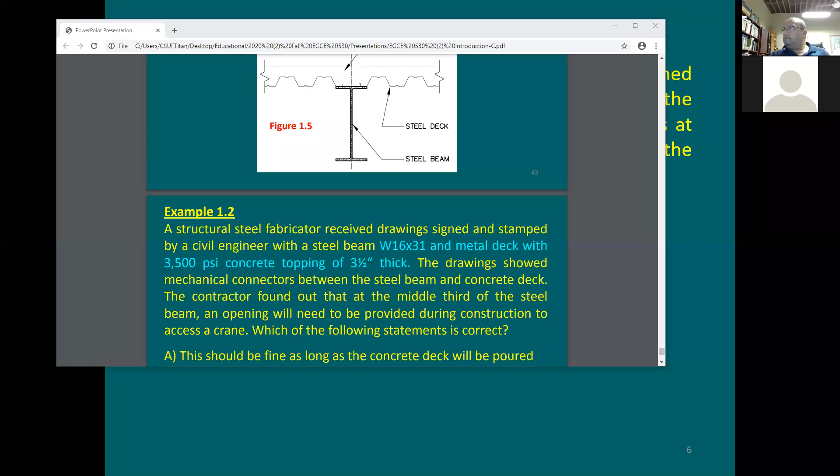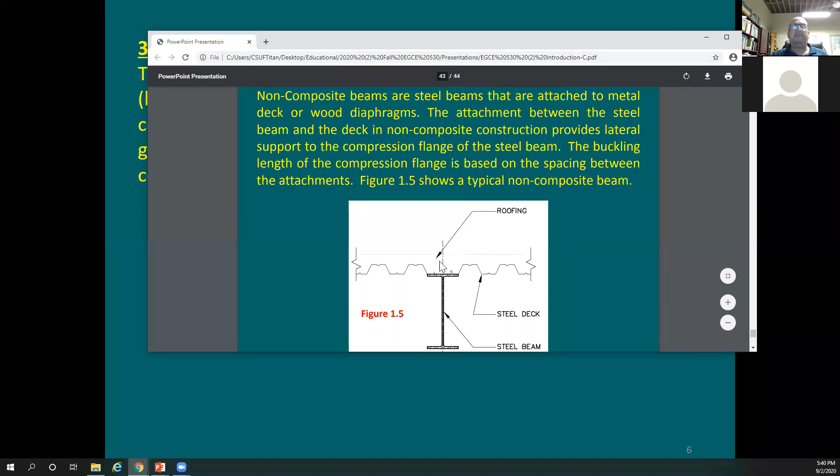So we have discussed what we have here in terms of composite and non-composite beams, a concept. Now, since we have this composite beam or non-composite beam, we're going to have a metal deck, and the metal deck is going to be attached to the steel beam.

In composite, the stud spacing - because this stud is not going to be just one stud, it's going to be many studs throughout the length of the beam. And the maximum spacing between two studs is going to be a foot, like 12 inches.

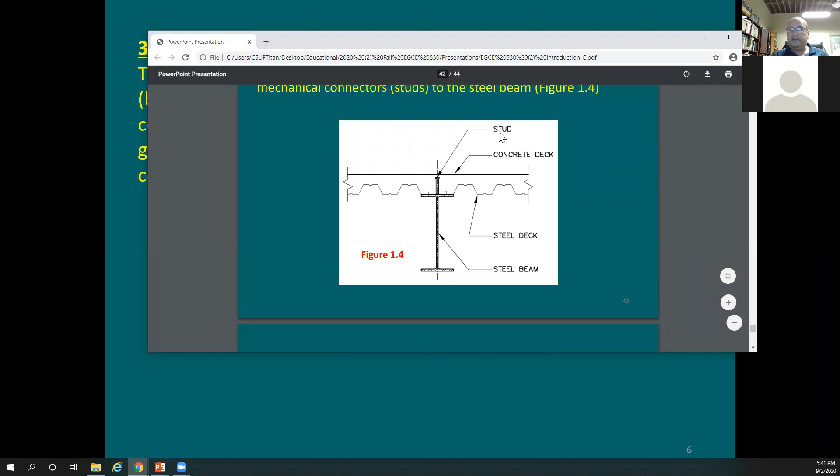In this case, the top flange is going to be completely braced from lateral movement, right and left. Once you put any loads, if there's no bracing to the top of the beam, this top flange now wants to go right or left. It depends on the loading.

Sir, what is the maximum spacing allowed between two studs? Maximum spacing 12 inches usually.

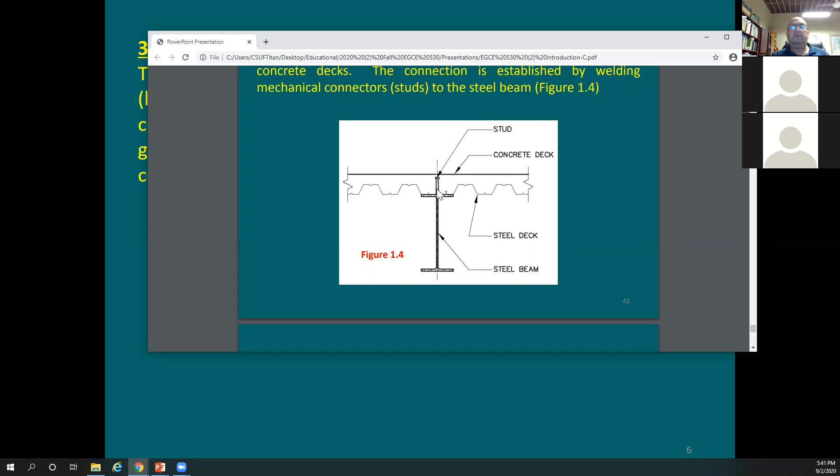In construction, we make it from a stud to a stud throughout the length of the beam, which means perpendicular to the screen here, is going to be a foot, like 12 inches, right? Okay, so with this spacing here, there is no chance for this top flange here to deflect right or left.

So in this case, the deck is going to be attached to the top of the beam. It's going to be bracing it. And this is going to be good because the buckling length of the beam here is going to be equal to, let's say, a foot. It's going to be very small.

Now, what happens if there is no good connection between the metal deck or concrete deck and the beam? It means here that the top of the beam is going to be rotating right and left, moving right or left. And the strength of the beam is going to get reduced.

It's not going to be as strong as when you have this connection between the metal deck and the steel beam, whether you have it as composite or non-composite. But just because of this, the top of the beam is going to start to buckle either right or left, it's going to be a loss in the strength.

And I'm sure that you guys studied this in steel one, and you have seen graphs that show with the buckling length of the beam, you're going to have some reduction in the flexure strength, not the shear strength. Okay.

Let's say that you have a beam here, and there's no metal deck on the top, nothing at all on the top, which means no bracing.

But you come here, you start to put some bracing points. How do you put these bracing points? By providing either a brace in the lateral direction, which means if I'm going to go back here, I'm talking about that you're going to see a beam going right and left.

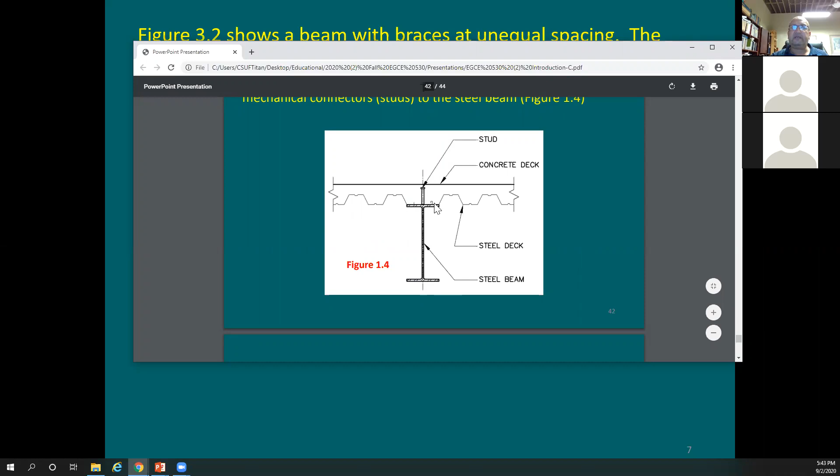Or a brace, like a steel brace that you're going to see there. This is what you call a bracing element, or this is going to be putting here a bracing point for the steel beam. Now let's look here at the maximum spacing between two brace points.

So instead of having the total buckling length of the beam be the span, we're able to reduce it to L3. So in many cases, you start to design an unbraced top flange beam, and all of a sudden the strength is not good enough.

So one of the options you can do is put here a bracing point, let's say at the mid span, and with that, you cut the buckling length into half. This is provided that I don't have a metal deck on the top, because the easy way, instead of adding a structural member for bracing, is to just attach the metal deck to the steel beam.

So now we have two options. Some beams have metal deck, and in this case, it's going to be bracing the top flange of the beam, and the buckling length is going to be almost equal to 0. If you have metal studs connected to the concrete, let's say it's going to be about 12 inches or a foot, which means design-wise, it's going to be equal to 0.

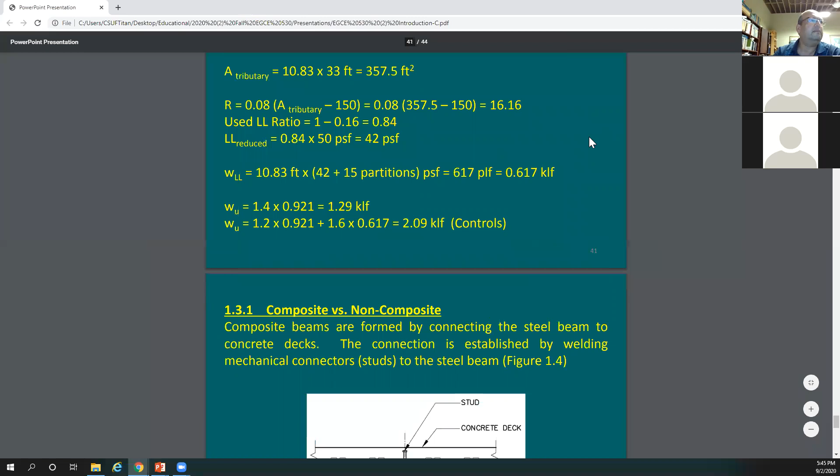What is the Z factor? Z factor is going to be the section modulus, and you can read it or look it up from the steel section tables.

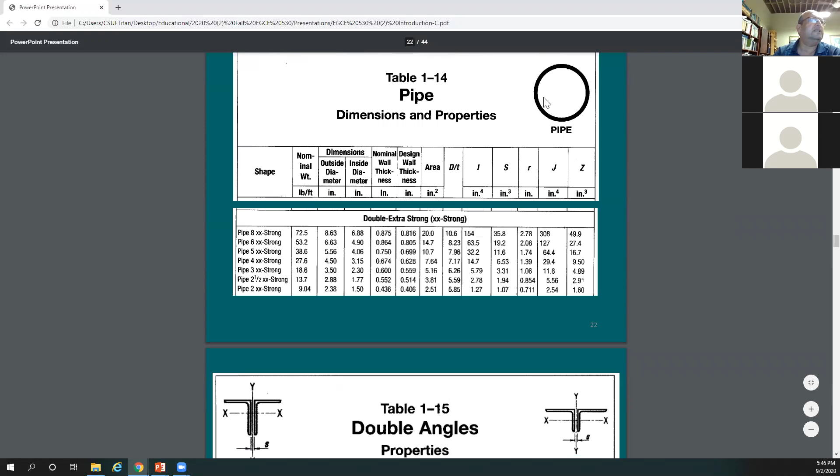Let me go up here, W sections, this is from the introduction slide set. Can be going here, let's hope it's gonna be there, it's gonna be on the other side of the page. Do you guys have the steel manual handy? Anyone has it handy?

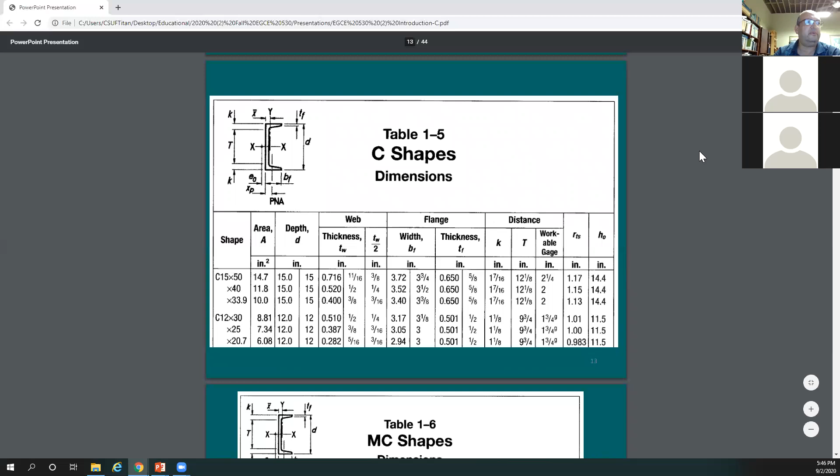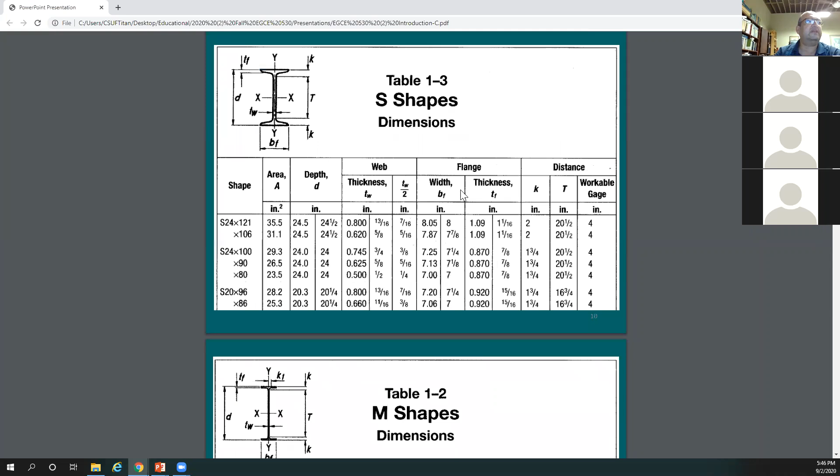Yes, professor. Okay, like in this value, for example, this Z, section modulus. Usually in the steel book, you're gonna see two pages against each other, next to each other. The left page includes this, like the W section, this is the section I have out of it. The right page shows lots of other information like moment of inertia, radius of gyration, and many other values, including also section modulus.

Section modulus, we have two of them: the elastic and the plastic one. The elastic is called, like in here, S - this is the elastic section modulus. The plastic section modulus is this Z, and usually this is more than the elastic value.

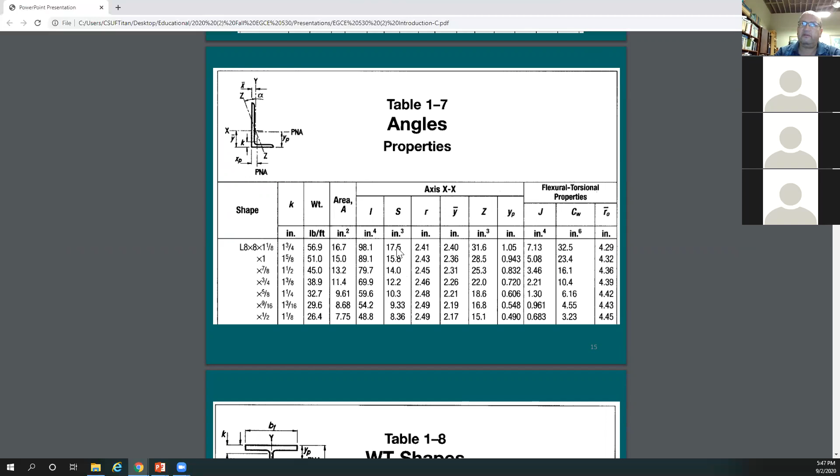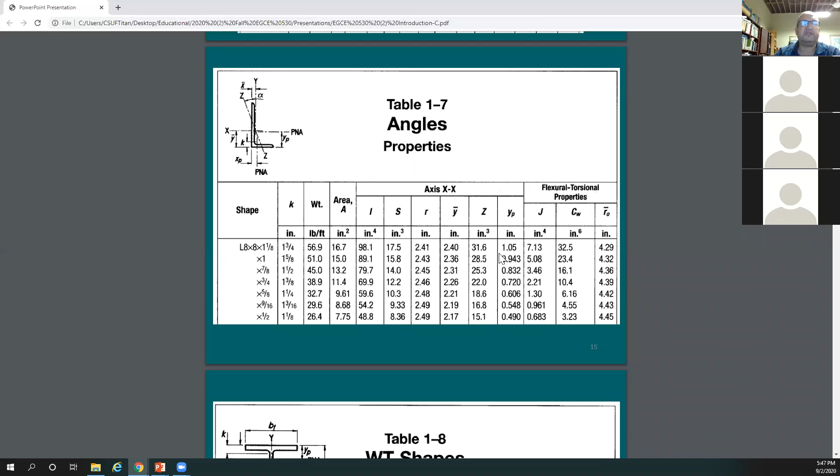When the entire section is plasticized, as you guys have studied before in structural steel 1, look what happened - the value is much larger than the one for the elastic analysis. Look at these values compared to these values. So the good thing is we're going to be doing plastic analysis when it comes to flexure strength, and we're going to be using this Z factor about the x-axis.

So back here to our flexure equation: if the buckling length is equal to 0, phi Mn equals the phi factor of 0.9 multiplied by yield strength multiplied by the Z factor. Z factor again is the plastic section modulus.

Okay, good. How about if I have some length? What should I do? In this case, you need to go back to some tables in the structural steel manual, and of course there's lots of equations. You're going to include this L sub B, which in this case equals L3, put it in the equation and get some reduction factor to the flexure strength.

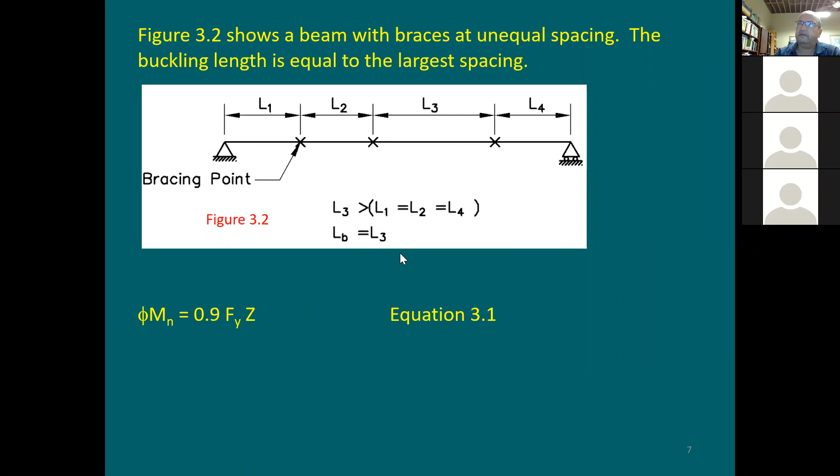You guys have studied this in structural steel 1. Here, I'm going to be targeting the composite sections, so I'm not interested in repeating this section that you guys have covered already.

When it comes to shear strength, there's no reduction because of the buckling length of the beam. The shear strength for the beam section is going to be equal to phi sub V for shear, times, usually instead of using F sub Y, when it comes to shear you use 0.6 of F sub Y. This is kind of standard - once you see your shear strength, you usually have this reduction of 0.6 times Fy. So instead of using F sub Y, use 0.6 of it.

How about the phi factor? We're going to be going through it, see how much this phi factor is. But usually, if you're going to be using this 0.6 reduction, it's going to be equal to 1, not 0.9 - 0.9 is used for flexure. Times CV, which is a coefficient we're going to go through, we'll see exactly what value to use for it, but most likely it's going to be equal to 1. So this is some good news, this is going to be simple - it's going to be 1, and this is going to be 1.

About Aw, the web cross-section area - now, where is the web? Someone's going to say this is the flange. And where's the web?

Some people say the web starts from here to here, but look at this picture. The area of the web is going to be equal to the total depth of the beam.

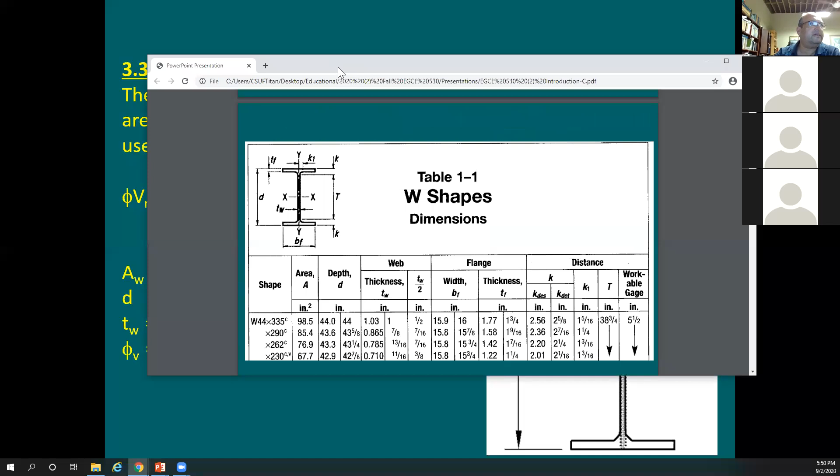When you talk about total depth of the beam, you need to look it up in the steel manual, in the steel book, and take it from there. In our case, I'm talking about W44 by 230. Depth is 42.9. Don't say now it's going to be 44.

44 is the nominal depth, which means it's about 44 inches. As you see here, it goes from 44 to a much lower value. So in this case, for W44 by 230, let's use this factor and not this other one. This other number is used for detailing and construction, while this number is used for analysis and design.

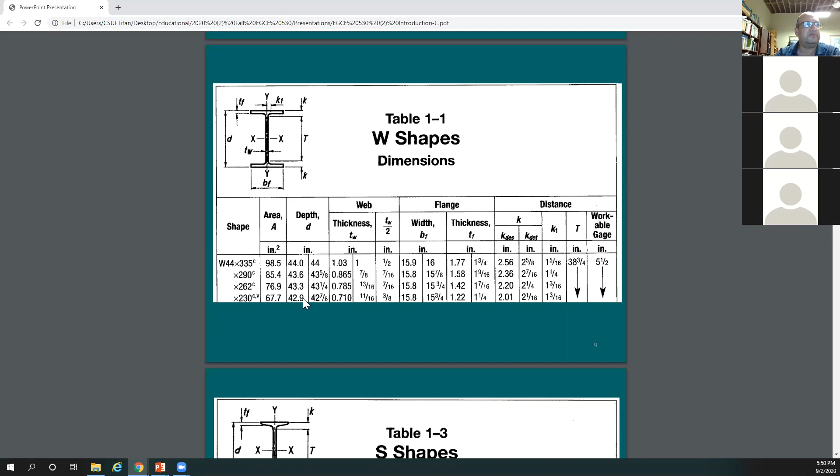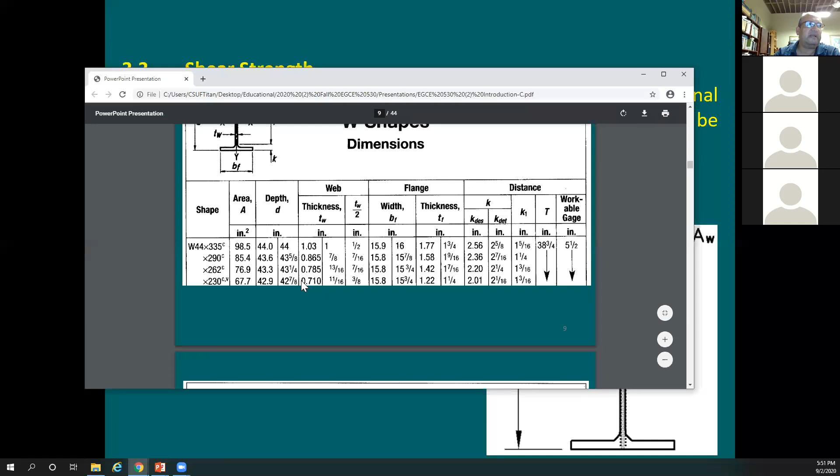So the area of the web is equal to the total depth multiplied by the web thickness. Again, where did you get the web thickness from? From the steel table. Let me show you where we have it here - this is T-web. In our case, T-web is 0.71, and it's in inches. You take this number, the depth, times the web thickness in inches, and you get the area of the web in square inches. Okay, good.

Now let's see the factors we're talking about. What is the value of the strength reduction factor? I'm sorry, can you repeat that please? What will be the... okay, it's given.

So here, these are the two factors I'd like to work with: the strength reduction factor and the coefficient for shear.

As long as H over TW - what is H in this case? Which means D, the depth, is also called H here. This is now in the AISC code itself. Once this H divided by TW is less than or equal to 2.24 times the square root of E divided by F sub Y...

How much is E? I'm going to put here 29,000 ksi, and F sub Y is going to be based on the steel. In most cases, for W sections, let's say it equals 50.

This means almost for all beams, Phi sub V is going to equal 1 and C sub V is going to equal 1, as it says here. This applies to all grade 50 sections. As long as Fy equals 50, this applies to all sections - except for the following.

Phi sub V is going to equal 0.9 for only these sections. How many sections do you have here? You have 8 sections, that's it. Any other section, you're going to see Phi sub V equals 1 and C sub V equals 1.0.

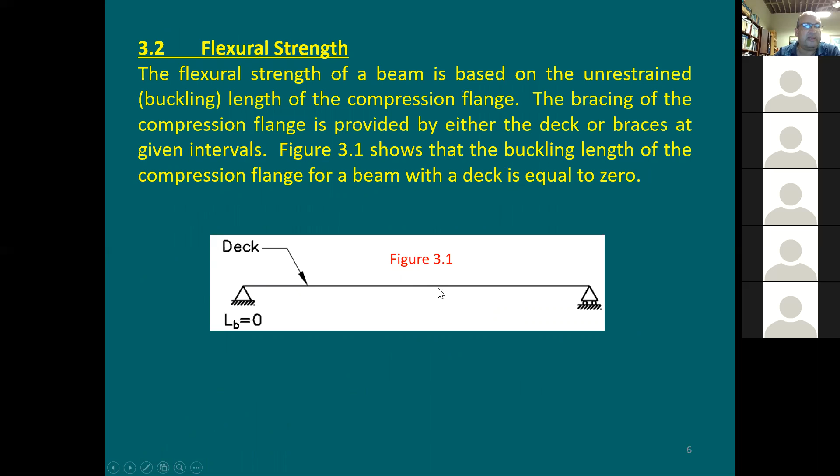I don't think I've seen it. I will assume that you guys know it, unless someone says no, we don't know it. So, I don't think I've seen it. You have not seen it - have you taken statics? Yes sir, I did. Say it again. Yes sir, I did. Okay, and have you taken mechanics of materials? No? I think so.

This is like before - usually before you take a design course, you need to take a statics course, and then at least structural analysis 1 after statics. And also you need to take mechanics of materials, because when it comes to stresses and strains, when it comes to deflection, this is basic knowledge that you need to have.

But let me explain to you - you understand the meaning of deflection? Yes sir, deflection means sagging, like when the beam comes down. Yes, so this deflection is the maximum deflection at the middle span of the beam, right? This is how much it's going to go down due to these applied loads, and it is measured here in inches.

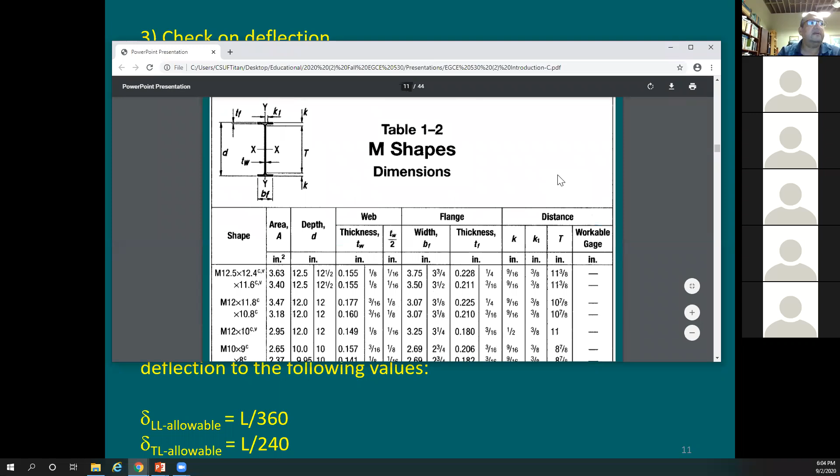Yes, yes. Good, all right. And I is going to be the moment of inertia that you take from the table. I can put this table back again for you, so that you see the moment of inertia listed here. So usually you read it off the table.

I'm gonna put it here in a second. Here's the moment of inertia for that section.

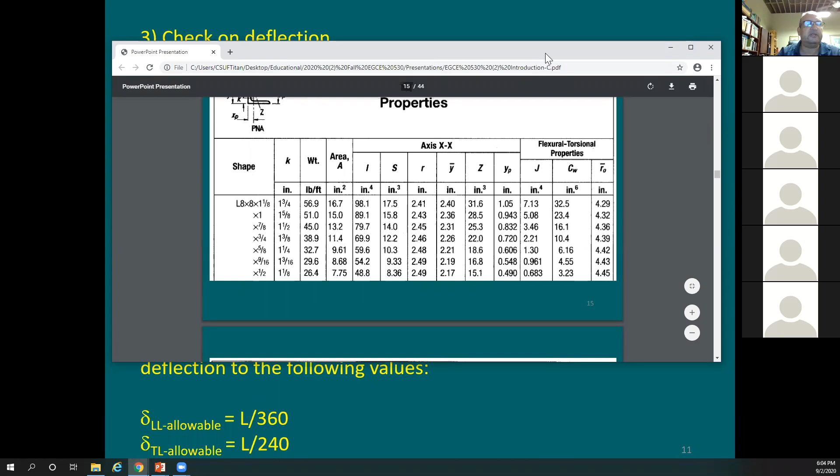This moment of inertia about the x-axis is what you need to use in your equation. Let's say you pick a beam section, any sort of section, this moment of inertia you just look up in the table. You don't need to calculate it yourself.

All you need is to look it up and use it in this analysis, and with that you'll have deflection due to the applied load. Now if you use total load in your equation, meaning dead load plus live load, the deflection resulted is going to be called deflection due to total load. If you put only live load, the deflection is going to be called live load deflection. It's the actual deflection due to the applied load on the beam you picked and chose.

Now you need to compare this live load deflection with the limit, and dead load deflection with live load deflection all together you compare with the total load allowable deflection. You don't want this demand deflection to exceed the limit, you'd like to be within the limit. Does this make sense to you guys? Yes? Do I have any questions on that, or we're good?

Is there a scenario where we use the moment of inertia about the y-axis? This is the scenario when you use the moment of inertia about the x-axis, yes, for the beam. Because usually the way you're going to be looking at the beam, this beam is going to be looked at like this.

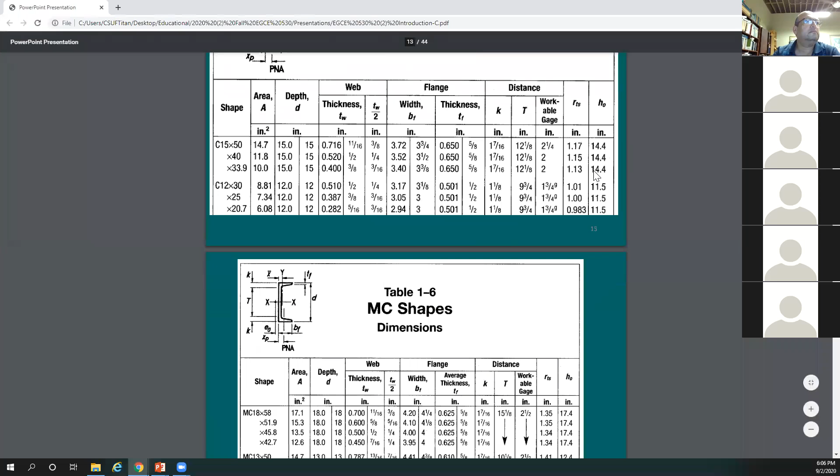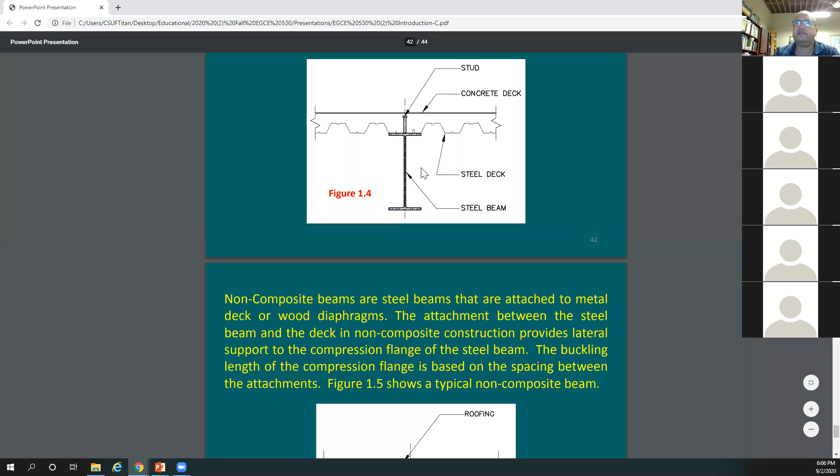Where is the x-axis? X-axis is right here, right? Look at the beam, standard beam, how it's going to look like. The beam is used like this, this is going to be the x-axis. So the moment of inertia I need to look at is going to be the x moment of inertia about its centroid.

All right, we're going to see some examples. Usually numbers make it much easier. This numerical example is very useful.

So it says here, top flange braced beam. This is given to me, the top flange is braced. This is some good news - I don't have any buckling and I don't have any composite action.

Dead load is given at 80 pounds per square foot. Live load is given as 50 pounds per square foot.

Now, can I do any reduction on this live load? Just a question here - should I reduce it like what I've done in the previous slide set? I'm gonna say no. Why? Because reduction happens when you know the occupancy. If you know this is an office or residential occupancy, you can do reduction for live load. If the live load is given to you as a number, you do not reduce it, just use it as is.

The steel used is going to be ASTM A992 grade 50. Now I know F sub Y is going to be equal to 50 KSI. Tributary width for the beam is 10 feet. Anyone has a question on the tributary width definition?

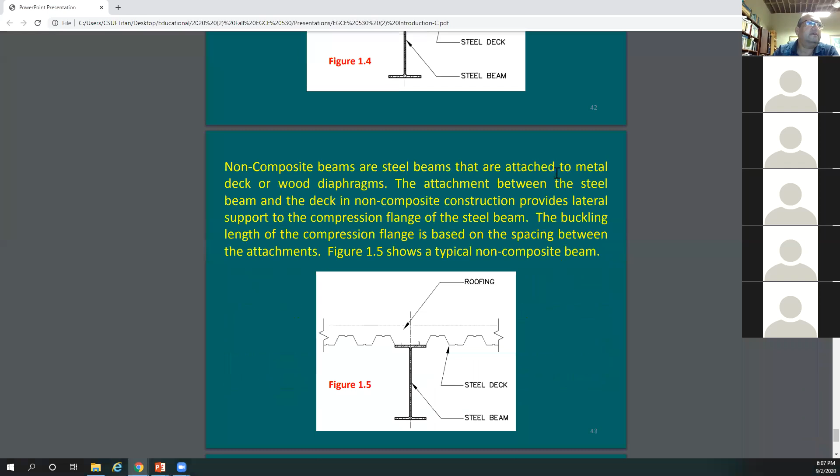It says here, determine the most economic. What does it mean by most economic? It means a lighter beam. Now when you look at the beams, let's say you see W16 by 31, W16 by 36. Now which one is lighter? The one that has a smaller number as weight, like 31, for example, or 26 or 36. Or W18 by - we call this just W18 by, there's no weight because I'd like to use one of these W16 bys, I don't know exactly which one. So this is gonna be my choice, it's gonna be my design.

So in a case like this, I'm gonna have two checks. One is gonna be for the flexure, for the moment. Second one is gonna be for the shear. And then serviceability check, which means check on deflection for live load and total load deflection. So let's go through this in detail.

Dead load is going to be equal to this uniform load, the 80, multiplied by the tributary width, the 10 feet. So in this case, this 80 PSF means 0.08 KSF. How can I do the conversion here? You just divide this by 1,000 because 1 kip is equivalent to 1,000 pounds.

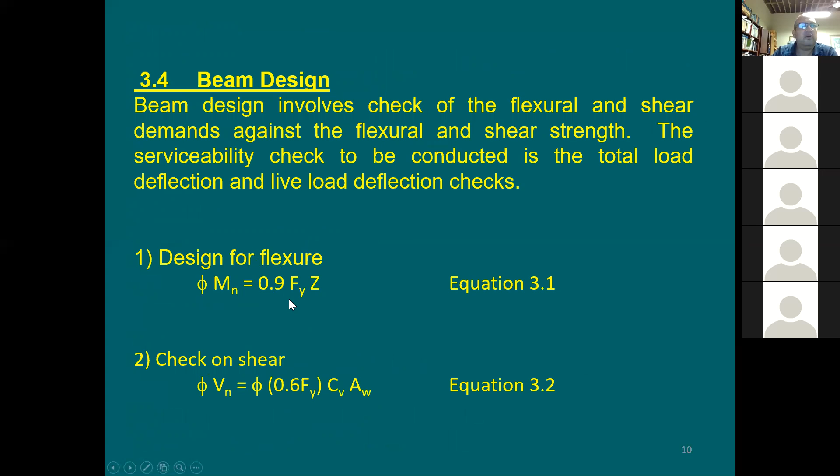I'm gonna take you back one slide. When you do flexure and shear check, you're going to be using ultimate load, meaning you'll have the load factors, LRFD. When you do the service check, use the loads as they happen, there's no factors, just add dead load to live load in your analysis. This is the reason I like to add both of these for deflection analysis, for serviceability analysis.

When it comes to the ultimate, I need to figure out the ultimate load. So I need to try 1.4 times dead load, see here's the dead load with 1.4 factor. Compare it with 1.2 dead plus 1.6 live. Now which number controls? Compare this to this, this is controlling my design.

I see a question coming. Professor, I just want to ask, are these the only two equations that we consider for LRFD design? This is correct, as long as you have only dead load and live load. So in this problem here, it says dead load, it says live load, and this will be the only factor that you need to consider in this exam.

But let's say in real practice, I'm going to take you back here. Let's say that I have soil pressure, where is soil pressure? It's going to be H. And I have dead load, there is no live load. So in this case, I'm going to be using 1.6 times H.

Let's say that I have seismic force, like I'm designing for seismic earthquake forces, it's going to be this E. So in this case, I'm going to have dead load, live load. So any equation here that shows dead load and live load, and earthquake, I need to consider them.

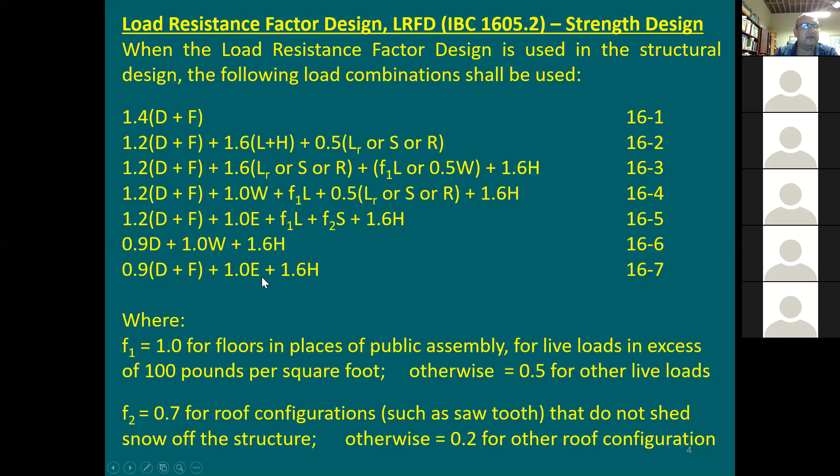So in this course, for the first section, I'm going to be working only with dead load and live load. Once we go to seismic moment frame and eccentric brace frame, it's going to be all about seismic forces, and in that case, this is going to be used. Okay? Sounds good. Thank you. All right, okay.

So again, I'm back to the load equation, load factors. So I find that 1.2 dead plus 1.6 live is going to give me a bigger number than 1.4 dead, and this is going to be my load to figure out the shear demand and moment demand.

Now this is going to be a simply supported beam, the span is 30 feet, you have a load of 1.76. How much is the moment? It's going to be the simple equation, W L squared divided by 8. How about the shear? Shear is going to be the same as a reaction, WL over 2. So we tried this, and here's the moment demand, and here is the shear demand.

Any questions on the shear demand and moment demand? This slide is good? All good. All right, very good.

Now, flexure design. I decided to use W16 by 31. Okay, good, this is going to be my choice. Looked up the ZX, which means the section plastic modulus, and it turns out to be 54 inch cubed. All right, let me try to find phi Mn.

Be careful about this trick here. You're going to be using the phi factor, 0.9. F sub y is going to be 50 KSI, kip per square inch, multiplied by inch cubed. So the units I use here are kip and inch, but you'd like to see the moment in kip and foot. So when you have moment in kip-inch, you need to divide by 12 to get it in kip-foot.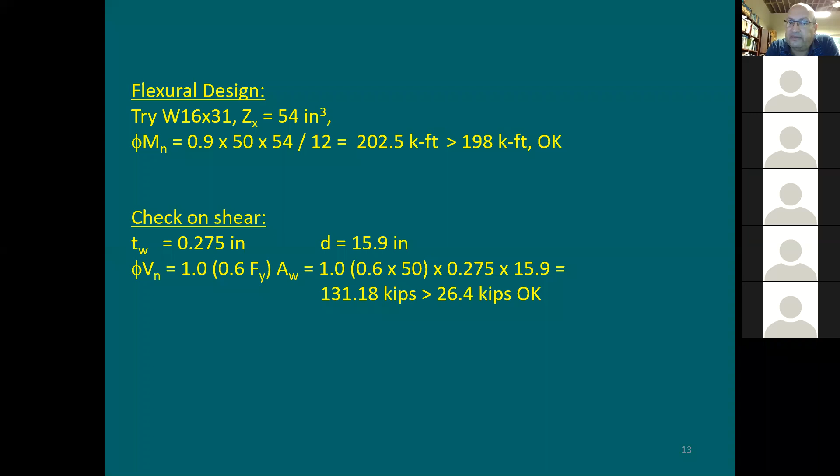If the demand is 198 and the strength is exactly 198, you're good. If they're exactly the same, identical numbers, I'm okay with this. Your design is good. Nothing is wrong with your design code-wise.

But if we increase the capacity, like in this case, it's preferred that you need to leave some room. You don't want your design to be tight, just in case you've done a little approximation, rounding your numbers up or down. If you're concerned you may have a difference, let's say about 1 foot, you'd better go a little bit above this number, just in case. But if the demand is exactly equal to the capacity, you're good, there's nothing wrong with this.

So strength-wise, this beam is good, this section is very good. It satisfies the flexure capacity and the shear strength. They're good, nothing is wrong with it.

But now let's do a check on the serviceability deflection check. In serviceability check, going back one slide, I cannot use this ultimate load when I do deflection. I'm going to be using the service loads because deflection is going to be due to live load and total load. Going back one more slide, I have the limits given by the code for live load deflection and total deflection. Live load means only live load, there are no load factors at all.

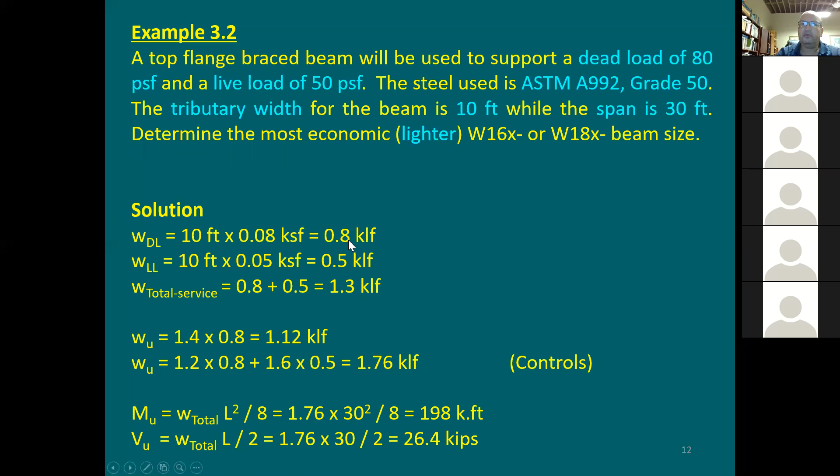I'm doing here a check on two loads: live load deflection, the 0.5, and total, which means the 1.3. I don't do it only for the dead load. You don't do that. You do it only for the live load, and then you do it for the total load, the 0.5 and the 1.3.

Now let's see here the limit. What is allowed by code when it comes to total deflection? As we say, this is going to be the span divided by 240. Now I want you guys to try quick. The span is going to be 30 feet times 12, divide this by 240. Let me know if this 1.5 inch is correct.

Is it really correct, Professor? Yeah, okay. Now, actual deflection is going to be 1.6. Limit or allowed deflection for total load is going to be only 1.5 inch. So this is not good. I cannot use this. This beam section is not good enough.

How about the live load deflection? Well, live load deflection, the span 30 feet times 12 divided by 360 is going to be an inch. Your live load deflection is 0.6 inches. So this is less than that, which means it's okay. So live load deflection works. Total deflection is not good.

So what should I do? I'm going to go here to the following section. Should I go to W16 by 36, the next heavier section? You say no, this is not a good idea because actually your moment of inertia is going to drop down. So I'm going to keep it as W18 and jump to W18 by 40.

What happened with W18 by 40? Moment of inertia is jumping. Now it becomes 612. Take this number, Professor? I'm sorry to interrupt, but how did we determine the moment of inertia capacity that we need? This moment of inertia, all what I did in the W18 by 35, I picked the next section, which is slightly heavier.

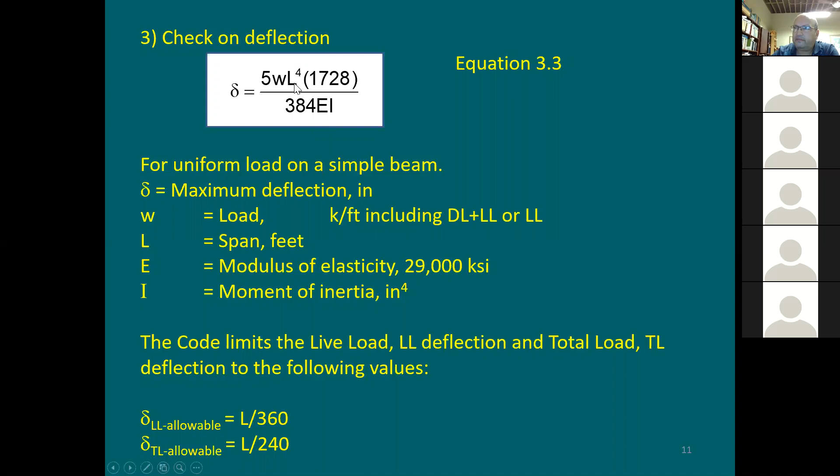Yes, so let me go back and look at this equation. What's happening there? We are converting the span from feet to inches. Absolutely, this is correct. Now when you look at this equation, W is going to be kip per foot, and the span is going to be in feet. So on top here I have kip and feet.

On the bottom I have kip and inches, and at the end I'd like to see this deflection in inches. So I need to get rid of the feet. How do you get rid of the feet? You convert the feet into inches. How do you do this? You multiply by 12 - so here's kip per foot, and here foot to the 4th.

So you have your kip per foot, and here is foot to the 4th - you end up with foot to the 3rd. You'd like to convert it, so you multiply by 12 to the 3rd, which is 1728. So the answer to this 1728 is a conversion factor for foot cubed into inches, so at the end my answer is in inches. Did I answer your question?

Yeah, it makes sense. Thank you. Right.

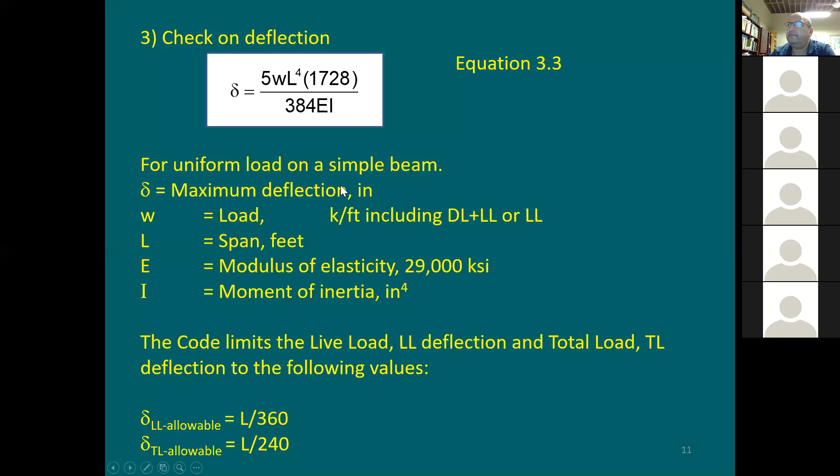One more example. It says here that they install the beam from the previous example - you know it needs to be W18 by 40. Strength-wise, W16 by 31 was okay, there's nothing wrong with it. The problem was the deflection, the serviceability, right?

So in this example, it's true that W16 by 31 is strong enough, but doesn't perform that well - it deflects a lot. Once you see lots of deflection and you're inside the room right below this beam, you're going to be kind of scared, feeling that this beam is falling down. It's not falling down, it's strong enough, but the deflection is excessive - you cannot accept it code-wise. So a mistake has happened: what they did here, they installed the beam as W16 by 31.

Now they installed it already, which means all the bolts are there and it's in place. And they say, look for a fix. You realize this, you're at the site, and you find out that they didn't do the right thing. Now you need to fix it.

An easy fix is to attach a plate below the steel beam and weld it to it, like in here.

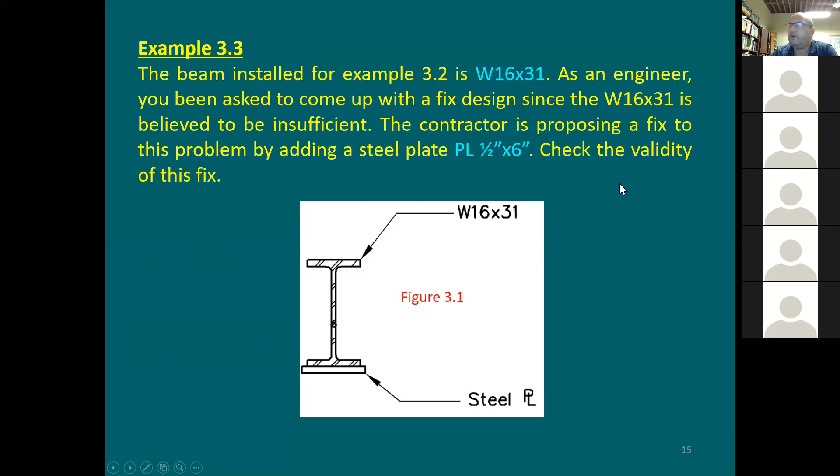Okay, here is a steel beam and here's the plate. I'm gonna do my table. I have the beam and the plate, like section 1 and section 2.

Cross-section area of the steel beam, W16 by 31, is gonna be 9.12. The plate is gonna be 1/2 inch by 6 inch. Forget about this 3/4 by 8 - I'm not gonna be using this in my example, because my example says use only 1/2 inch by 6 inch.

Okay, cross-section area of this plate is gonna be 3 square inches. What is this Y? Now we're taking an axis on the top of the beam, and for that I need to figure out Y1 and Y2. Y1 is from the top axis to the centroid of the W16 by 31 only, and Y2 is the distance from the top of the beam to the center of the plate.

There's going to be some geometrical properties that you can work out easily. Here is Y1 and this is Y2. Y1 is going to be equal to 1/2 of this. Y2 is going to be equal to the depth of the beam plus 1/2 of the plate thickness.

Now take the moment of this area about the top of the beam, A times Y. Multiply this by this, this by this, add them to each other, and for A, just add the total area, then divide by the total cross-section area. With that, you get the new location of the centroid for the combined section.

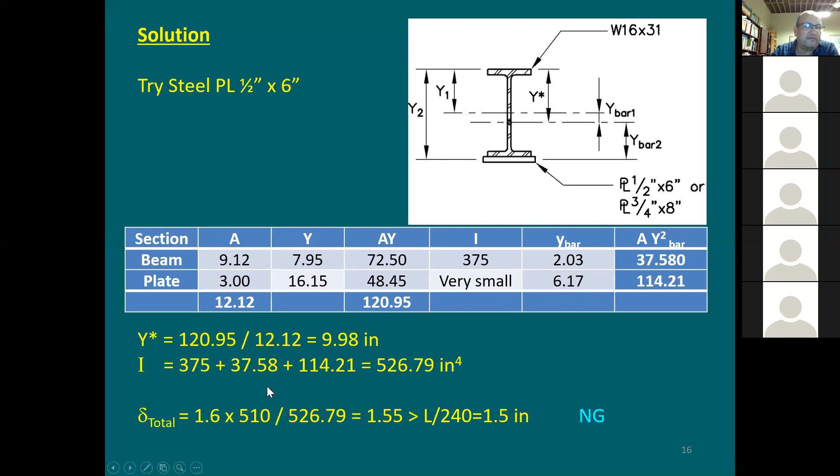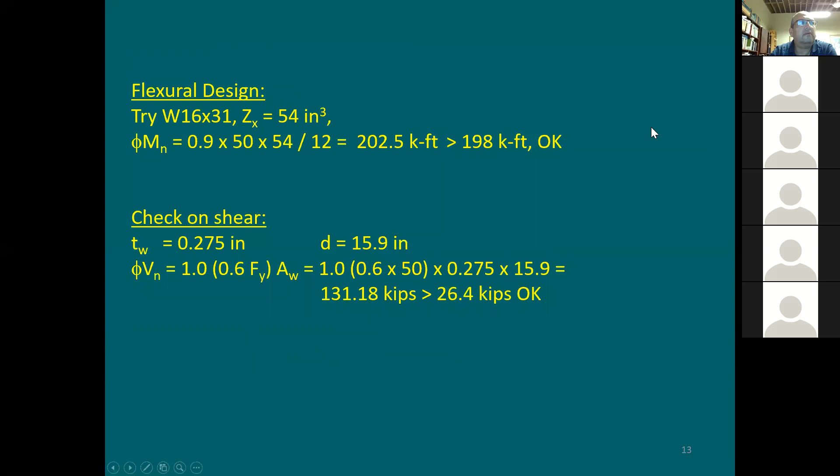The question was about where the 510 is coming from. The 510 is coming from the previous moment of inertia, calculated for a deflection of 1.6 inches. So if you go back to this equation, you take this to be equal to 1.6, and this goes in the denominator. So if you take 1.6 times 510, divide this by 526.79, it's going to get you the new deflection.

If you feel that this is kind of confusing, just try the entire equation again, it should be fine. Okay, thank you. All right, thank you.

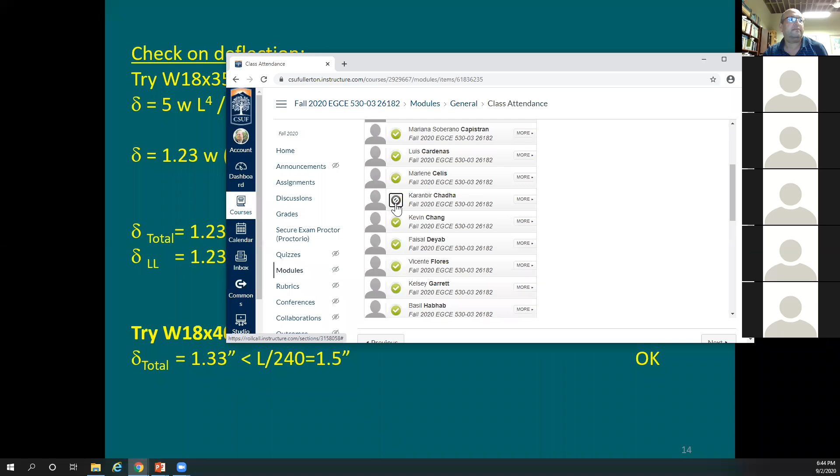All right, you guys have a good night. Thank you, Professor, have a good evening. You good too, good night, Professor. See you Wednesday. Good night, Professor. Do we have Monday lecture? Just one? No, okay, all right, good, so I'm gonna see you Wednesday.

Sir, we won't have a lecture on Monday. What's that? On Monday, will we have a lecture or not? Wednesday, yes, and Monday, no. No Monday, okay, we don't.

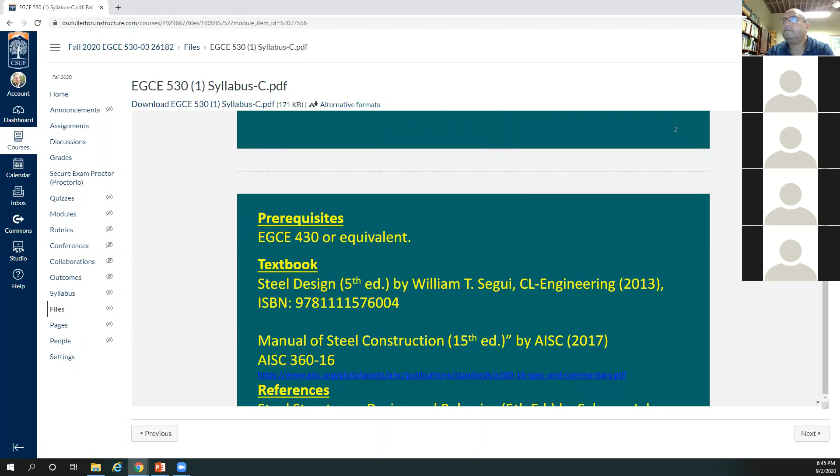Okay, Professor, good night. Good night. Thank you, Professor. Yes.